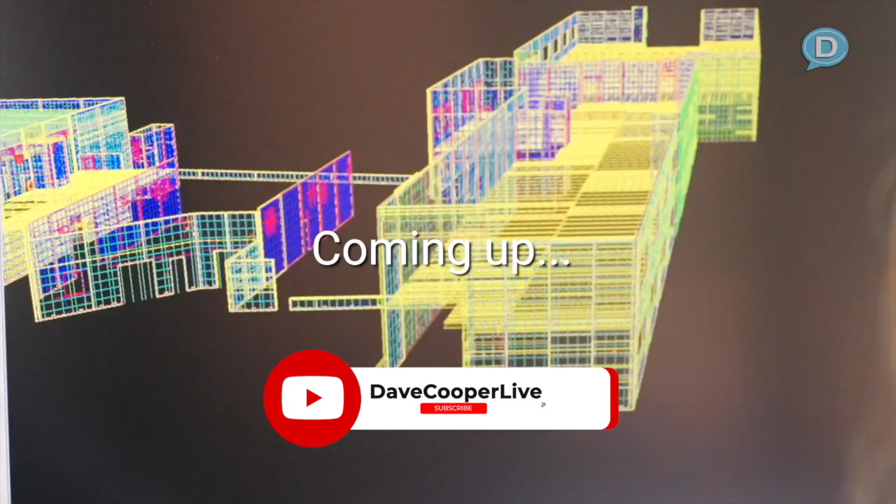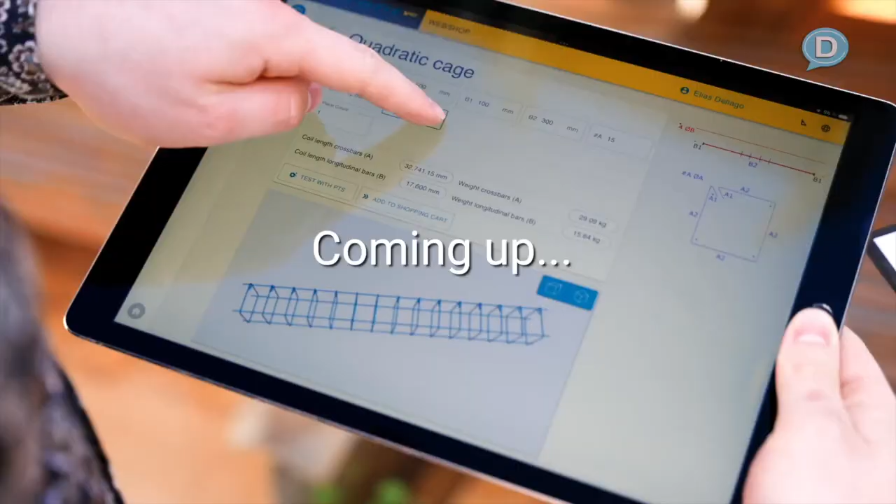Service, what we are providing, is facilitating the change. We are helping customers to change, to go in a certain direction. For that, it's a big advantage because they have a very strong partner where they can rely on and go the journey together with the clients.

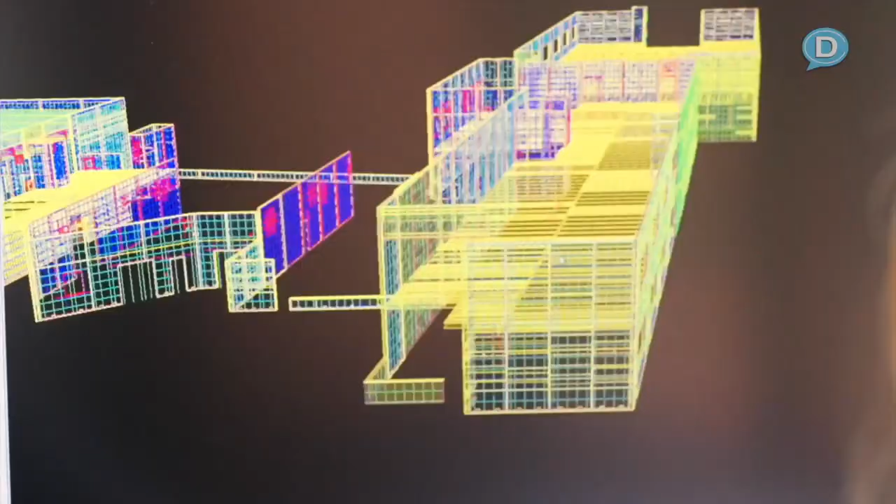Welcome everybody, Dave Cooper, and we are in Brixen, Italy, and today we're going to talk about an end-to-end solution in the industrialized manufacturing space. We are sitting at the Progress Group right now, and sitting with me is somebody that has been here for 20 years working on this, Hannes Huebser.

Hannes, welcome. I love this. So Hannes, tell us a little bit about who you are and what you have been doing for the last 20 years. Thanks. My name is Hannes. I'm working at Progress since 20 years now.

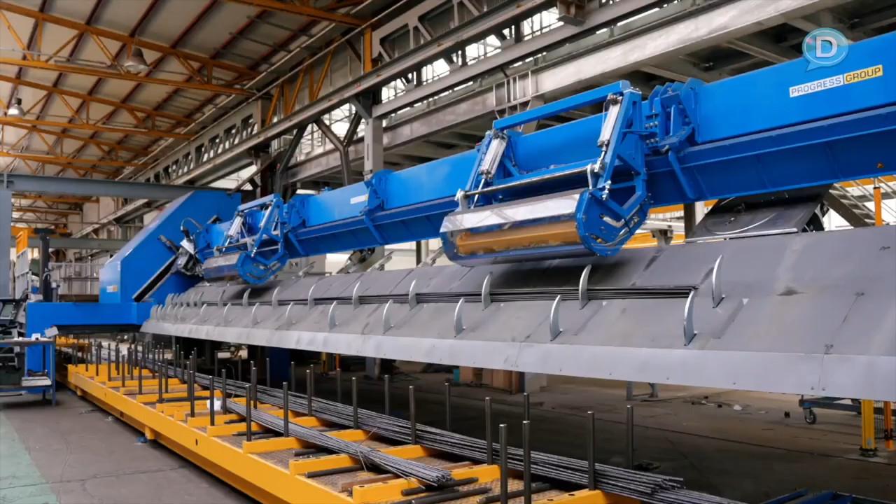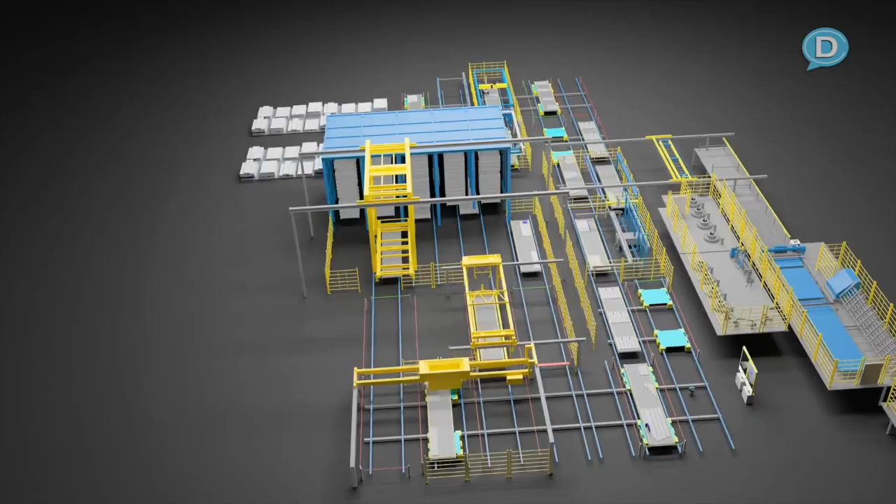I was always in the area of software development, and we evolved in the end from a machinery supplier to a full service provider to our customers, where we're offering different solutions, but all streamlined in the whole process end to end, from design over planning to production, in order to have a maximized output in the single production and to serve our customers better with products and processes in order to improve their products on site and in the end have much better building qualities.

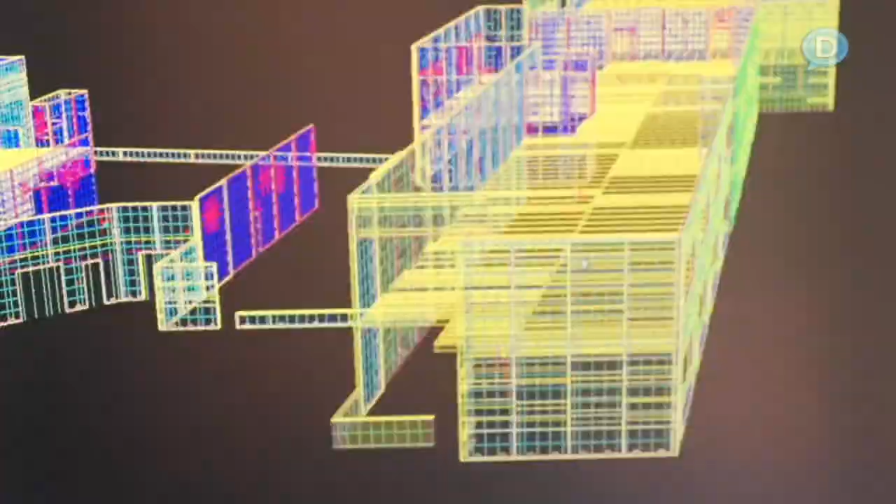I think this is fascinating. An end-to-end solution where it works from the designer, the architect, the engineer, the developer, all the way through manufacturing, through to the actual installation and construction on the job site, to me, is by itself an amazing feat, and a lot of people are really trying to understand how to do that, and you guys have done that here. Can we walk through the different components of what's involved in the end-to-end?

Because we have the architect, right, with their design files. So maybe let's walk through what that process looks like from start to finish. Say I'm an architect, and I want to use the Progress Group and green code, and I want to build with my concrete panelized wall structures with all the technology in it. You have the software that can do it.

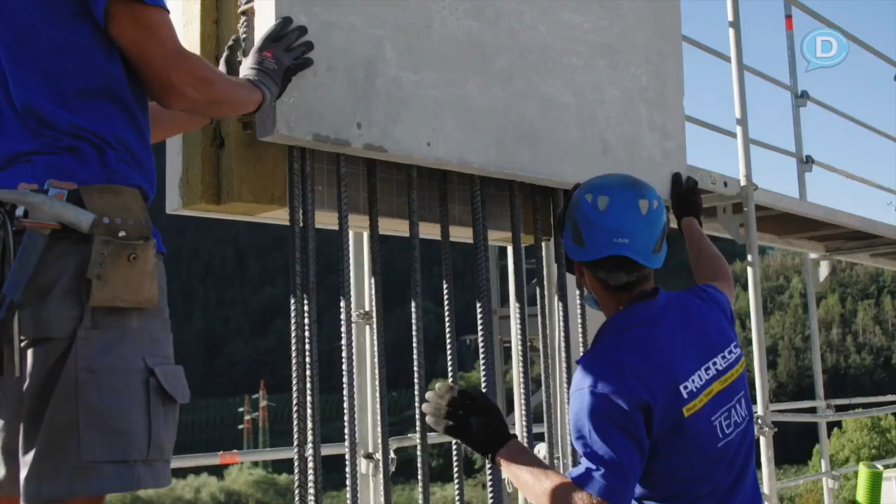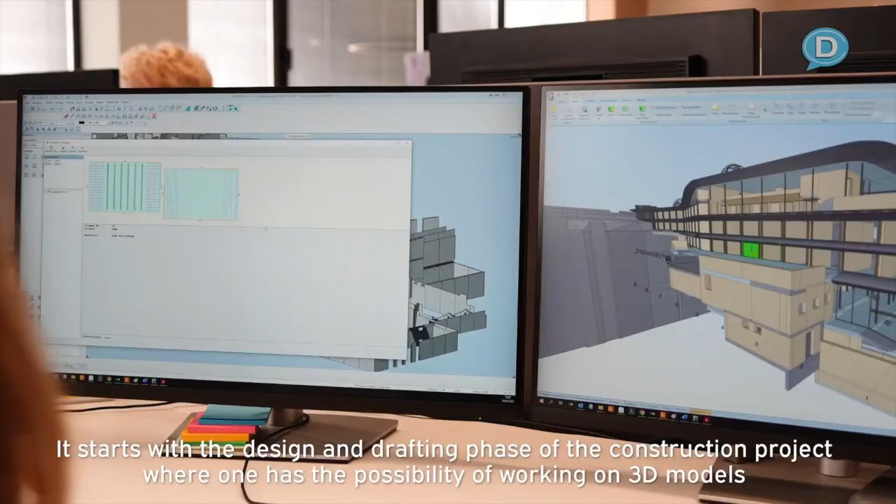Exactly. So what we are doing is, in the end, you can use the architectural model and transform it to our Revit model. We have a solution based on Autodesk Revit, where you can use the model of the architect, transform it in the Revit, and enhance there all the data what are needed for the later production. That means, in the end, you are creating products, we are adding informations, for example, like the electricity, the reinforcement, but all the details what you need in order to have an automatic production later on.

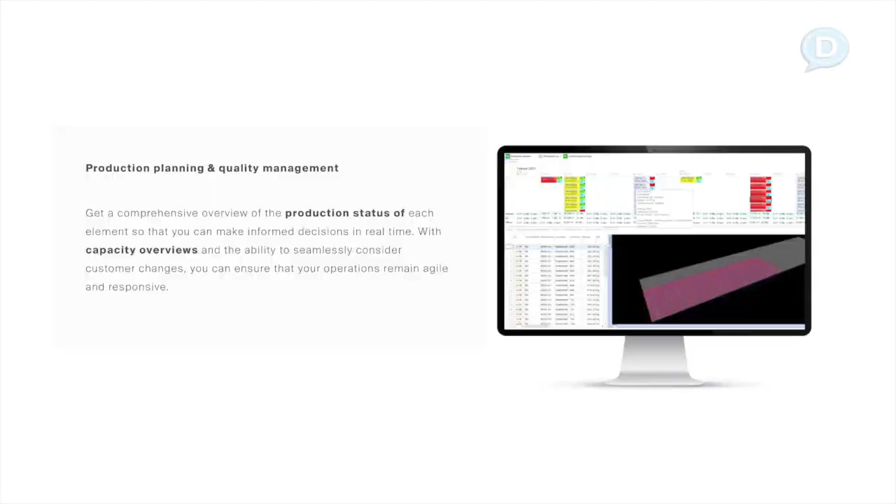The big advantage is you can optimize the single products, meaning also from a resource perspective. For example, you need less reinforcement, you need less concrete, because you can not just deal with the average information, but plan it already quite detailed, what is saving a lot of errors in the further process steps. For example, if you have like this building here, we designed floor elements where all the electricity, the tubes, the lightings, all the single reinforcement components, are integrated directly in the model, which is used then for the later process steps.

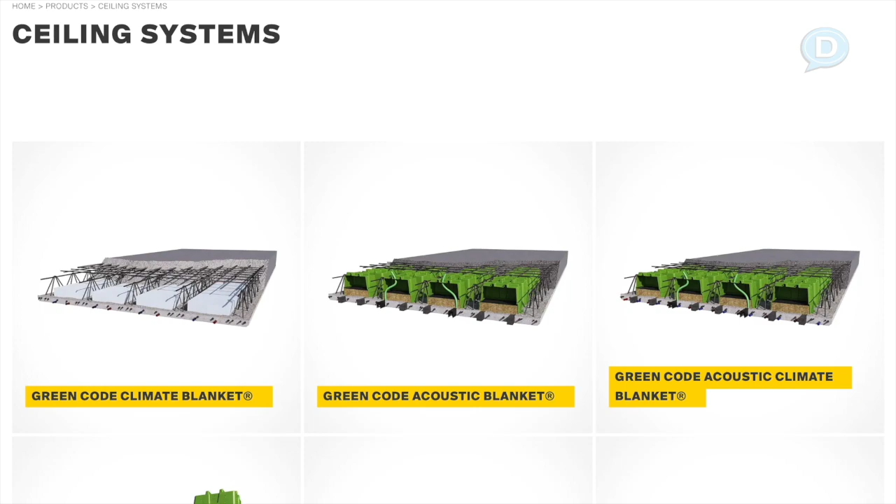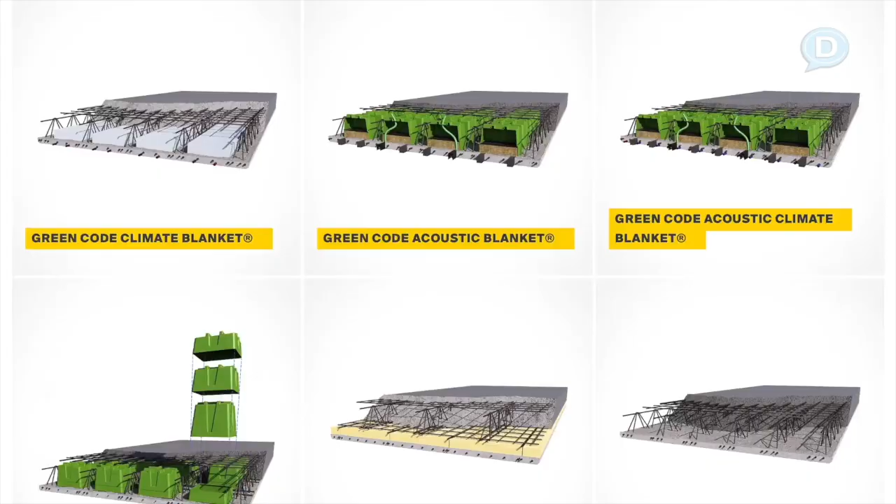So when we talk about the tubes, we're talking about heating and cooling, climatic ceilings already designed in. So if I'm a designer and an architect and I say, you know what, I want to build this way, but I'm just not sure how to get into it - you've pretty much taken the guesswork of how they can get into it, not only from the static structural elements of the building, but also the MEPs, the electrical, sound insulation, the acoustics, as well as insulation in general for heating and cooling.

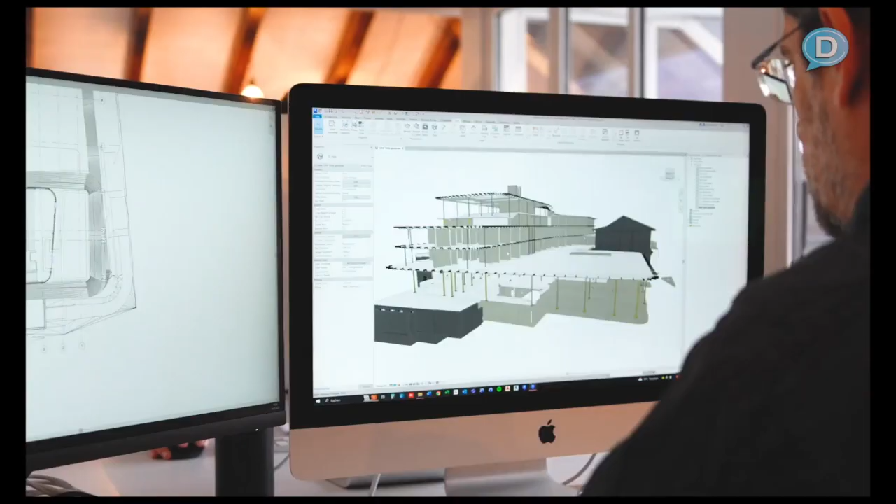So in the end, we are providing the service to our customers. We show them how to use the software solutions in order to build such products. That's a big advantage we can give to our customers, closing the gap between the architect and the structural engineer, streamlining the process where you're gaining a lot of time savings and material savings, becoming more efficient moving forward.

All right, so here I've designed a set of plans. I hand them over to the team here at the Progress Group. What happens next? So in the end, we can use this model and enhance it with information needed for precast.

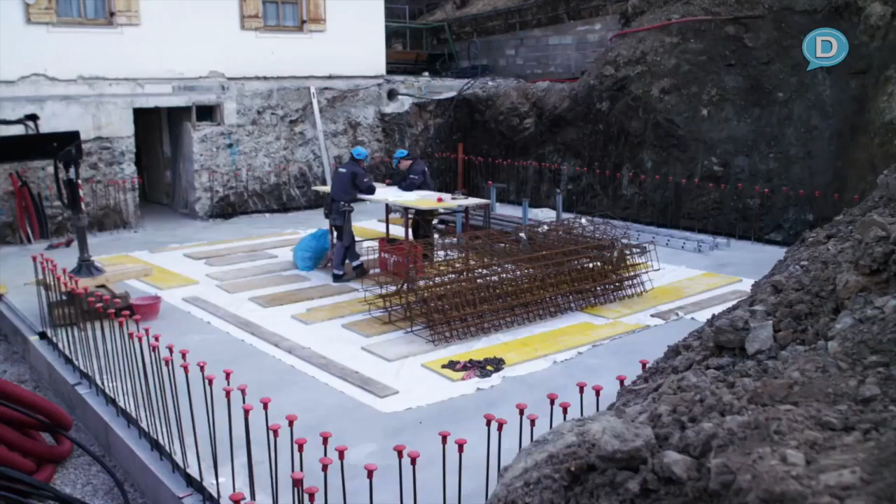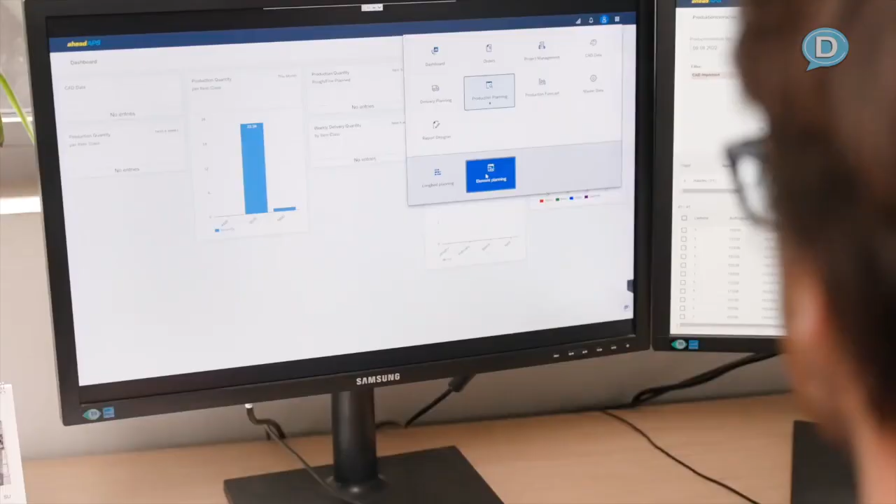We are detailing the single design, cutting it in pieces. We are also checking with the construction company for the erection sequence, meaning when you need the single pieces on site. We prepare the whole model so you can produce it just in time, but also in the sequence needed on the construction site. So the process begins with the end in mind - how is it going to go together on site?

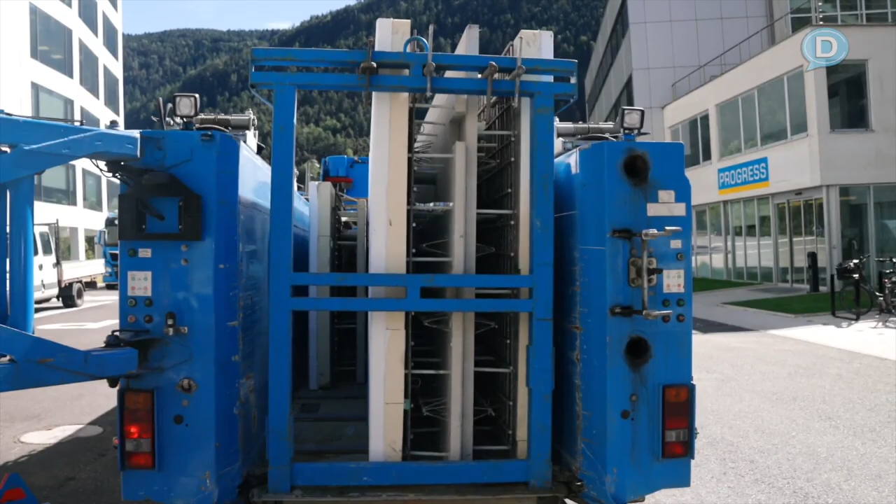And it sounds to me, if I understood you right, that you value engineer. You take their plans and say, well, we can optimize the efficiency of this construction, the efficiency of the materials, and you make those suggestions on your plans in collaboration with whoever the designer and architect was?

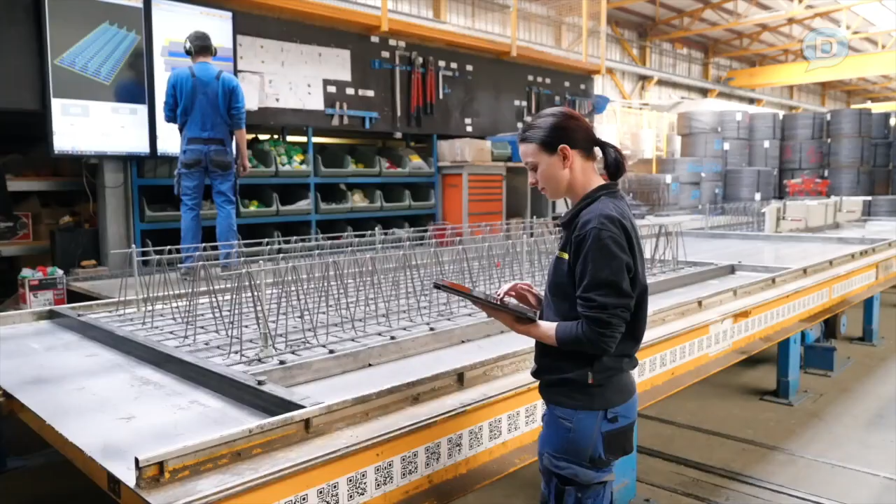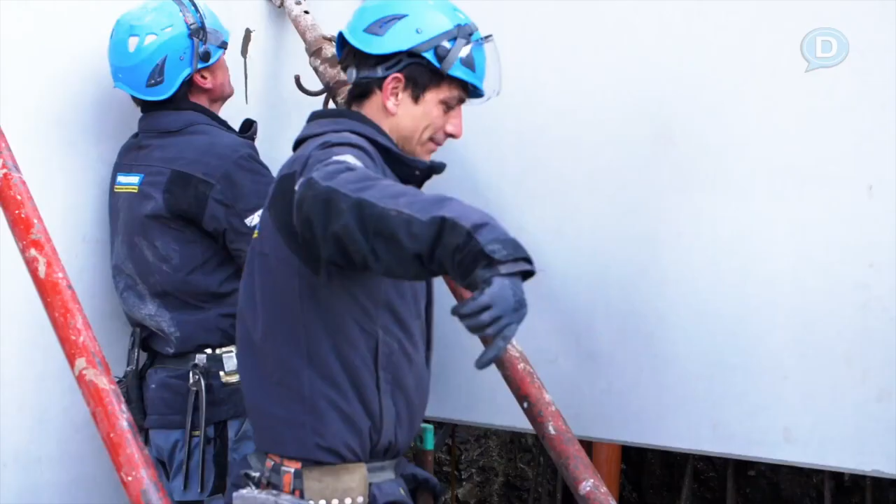Yeah exactly, because you can optimize the single products, but also the whole building in a controlled environment. That means we can plan it digitally, and we're not depending on single workers on site to make an optimization or cutout. So it's all controlled and industrialized. That means better quality, better safety standards, because we're not depending on people on site, and we need less people on site. The whole construction process goes much smoother, with big time savings and material savings, and we're shortening the whole life cycle of the construction.

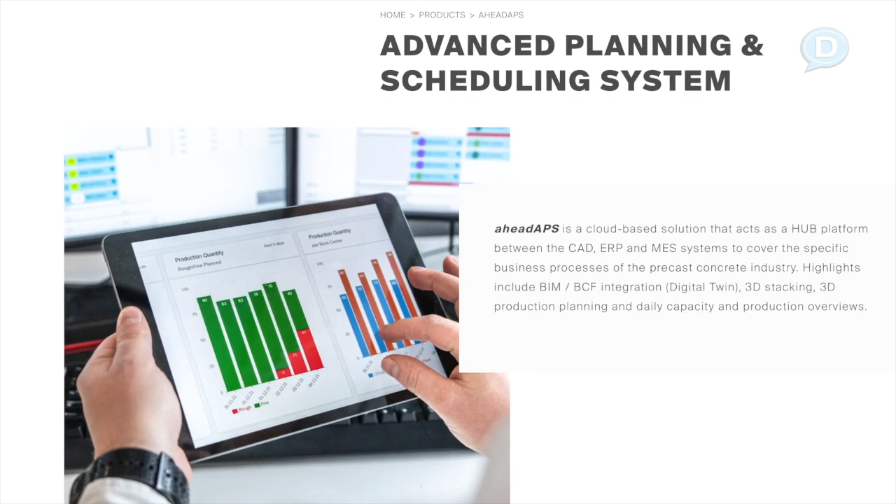Right, but this all translates back to the consumer whose project it is. Exactly, so in the end you have a better controlled environment, better safety standards. You need less materials, and in the end you have a cost advantage there, and you know what the cost is. You're not subject to the market changes as much, for sure.

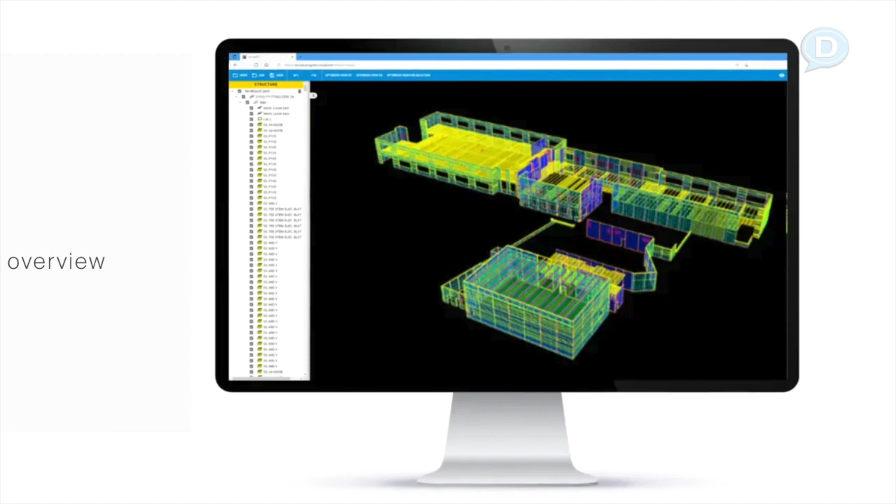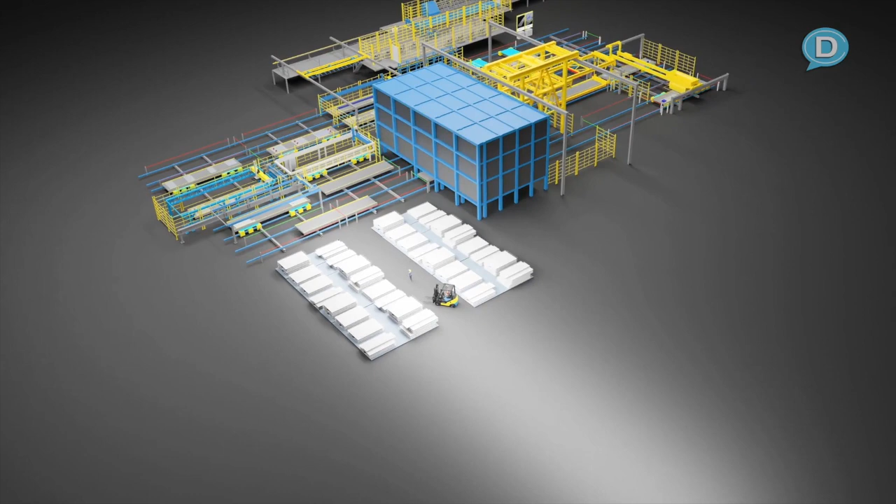All right, so you take their design and you do a digital twin, right? So you have a BIM model or Revit model of whatever it is. Everybody signs off on it and agrees, and then that model goes to manufacturing. Exactly, so in the end we plan the full process of how it should be produced - from a project management perspective, also from a supply chain perspective, and we steer the single production lines with the correct information.

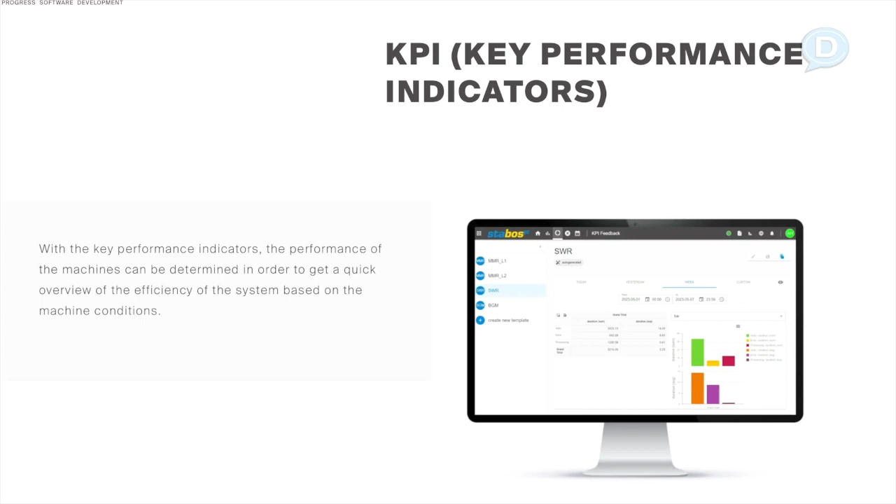That means we can optimize what needs to be produced, but also how it should be produced. There are some algorithms in there which can optimize the single productions for the efficiency perspective, and we can control all the materials needed in the production in order to produce the final element.

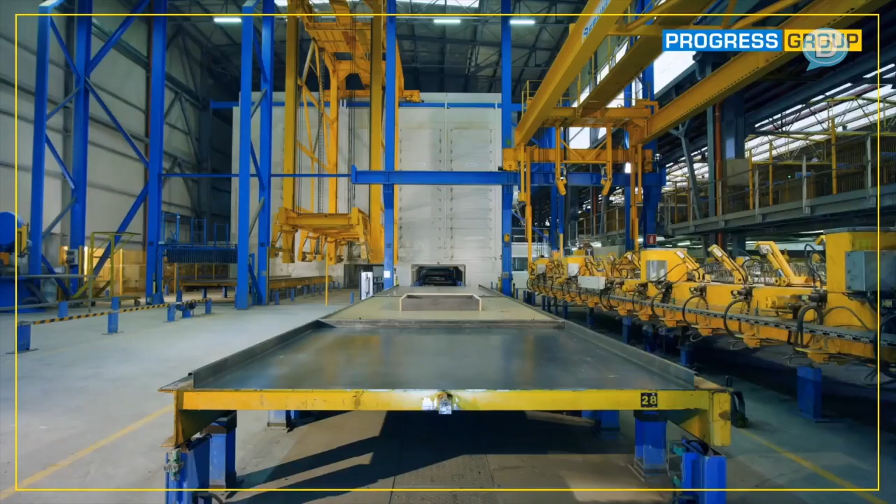From a designer and architect's perspective, am I limited on what I can build? In the end, you are limited by what the machines can fulfill. If you're splitting up the building into smaller pieces with single elements, you have a certain restriction, but that restriction isn't really a restriction because you can optimize that already in the model. So from an architectural perspective, there's not really a limit. The boundaries are more what the construction site is able to handle, but from a system perspective, there's not really a limit.

So you're not limited on your design - you can pretty much do any design. It's more just what the machines and the size of the panels can produce, or what the shipping requirements will allow, wherever it's going.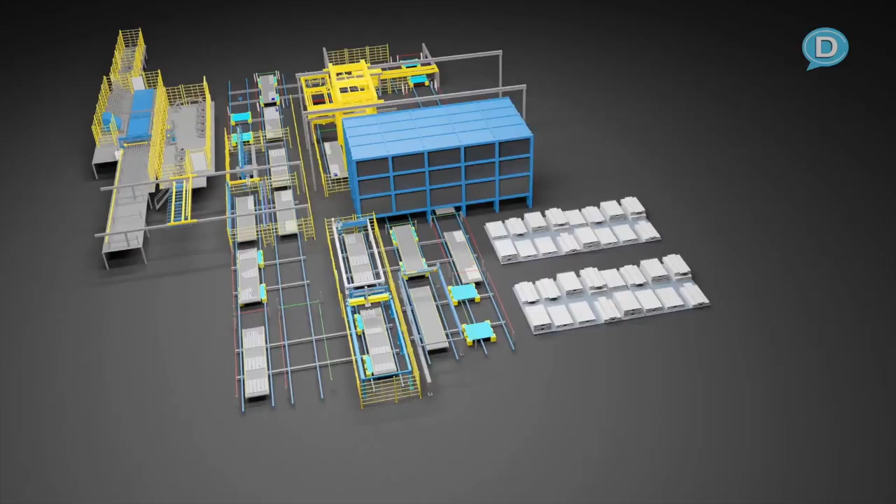Can changes be made real time to the plan? That's exactly the biggest advantage you have there. Since you have an integrated workflow from design to production, you're able to always make changes. Until the final production, you can always make constant updates.

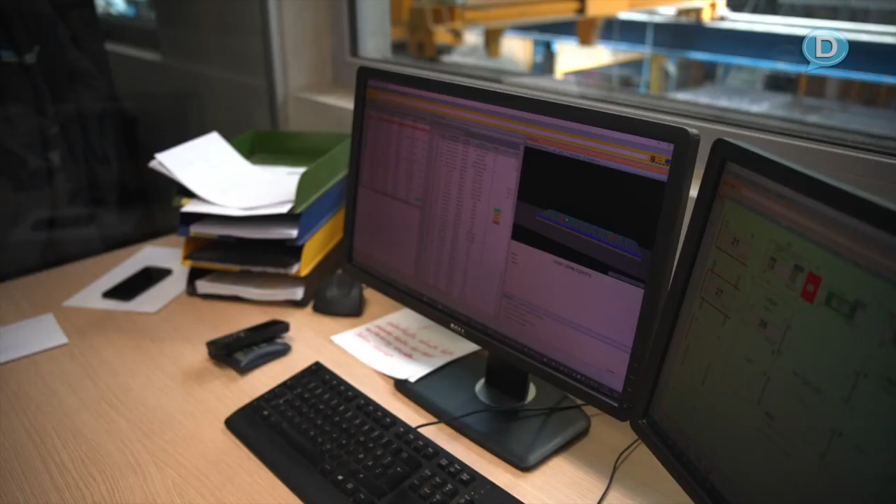The big advantage is, since we're streamlining the whole communication between the parties, everybody sees the same information. We're not depending on breaks between the single process steps, but we have one model used from design to production, meaning you can make constant changes up until a certain point. So it's one digital twin that everybody sees and works on, and if something is changed, it's automatically updated on everybody's tablet or computer.

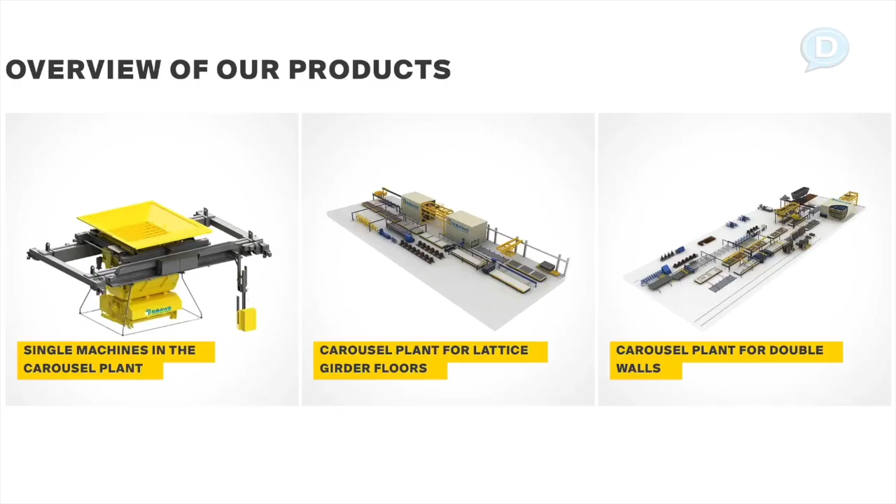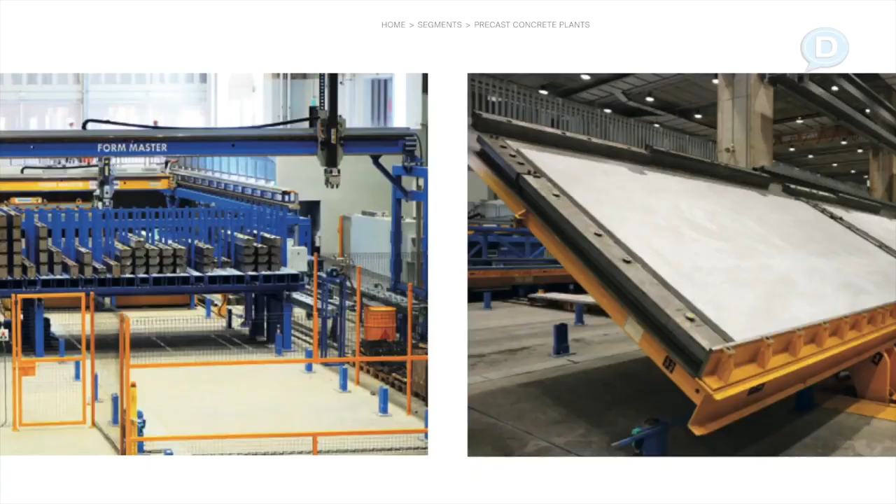The manufacturing side of this is super important alongside the software side, because you also build and develop the manufacturing machines. The Progress Group really controls everything in the flow of the products that go through. Exactly - we're not just doing the digitalization, but also the automation in the end. That means we're building the single machines, which are optimized, and with a digital process, automated machines used in an automatic plant. Later on we control the full process and full life cycle of such a product.

My project's now online. As an architect, designer, or one of the stakeholders in the project, can I actually visually see what's happening in the factory online and where my project is?

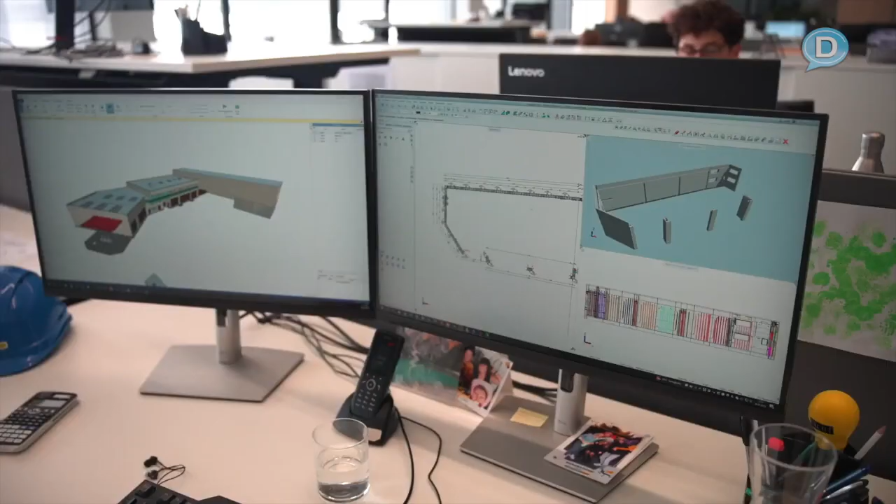This is actually the biggest advantage of a digital twin, because we can always feed back information at each process step. That means when you're producing a single element, we know exactly which type of recipe we used, which type of reinforcement, which type of electro boxes we put in, from which supplier we purchased them - so you can always trace back. That information is all provided to the model, meaning at each process step we know exactly where we are in production.

Are quality checks made already? Is it proven? Are there any issues? All of that is saved and can always be traced back to the single element, and used later on also for maintenance purposes, for example.

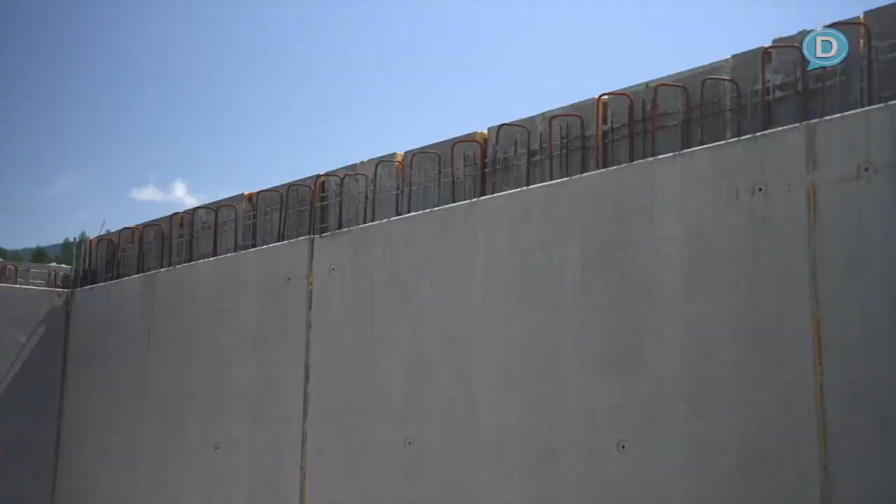That brings up a good point about tracing everything. What if I'm building in Austria or Germany and not here in Italy - does it change the process, the quality, or the materials I'm getting? The process isn't really changing. Obviously the type of materials I'm using is different, because, for example, the reinforcement is different here than in Austria. It's also important to always trace back where I purchased it.

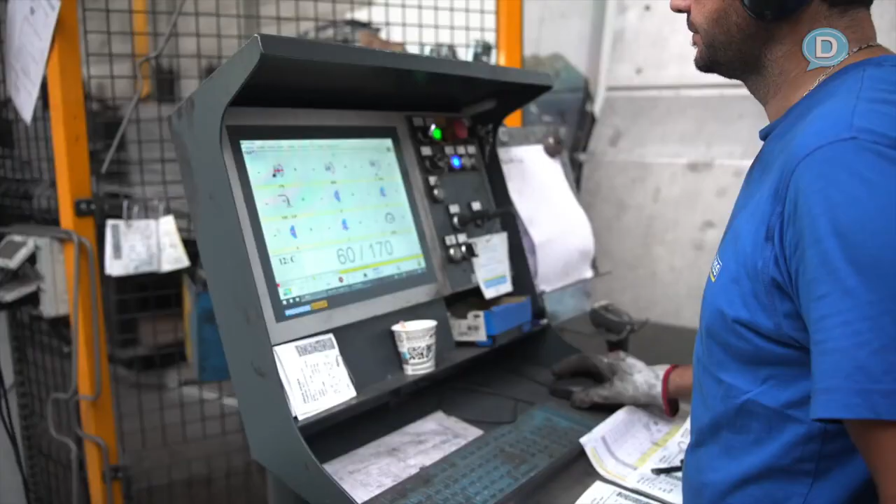For example, if there are quality issues with the reinforcement, we know exactly from that batch of reinforcement, which buildings did I use them in. So we have perfect traceability. It doesn't really affect anything - the same quality comes out every time. It's just whatever the building code requires - more building terms, regulations, that sort of thing. But the quality is always the same.

So here we are - we're in production. The first panels are coming out. Walk me through what happens at that point, and I'm sure the job site prep has already begun, right? We're ready to start building this. How does the end user know what's going on? Do they have access to the digital twin?

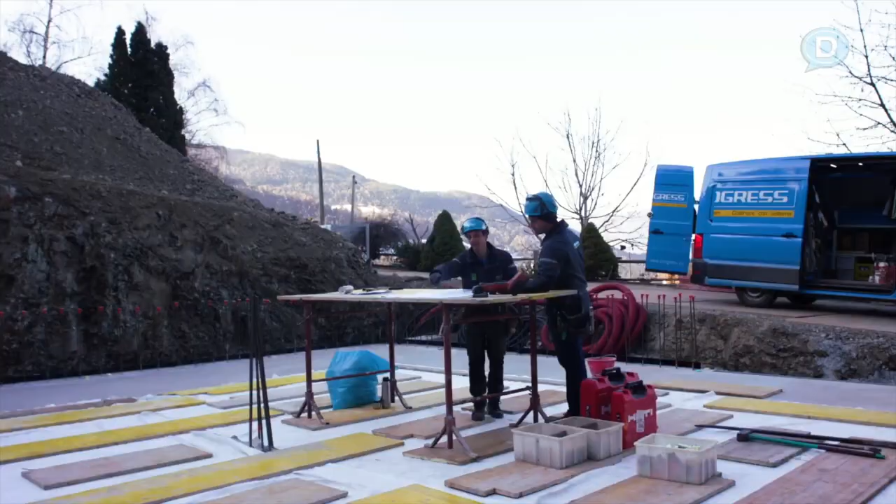Exactly - we're in constant communication always with the construction site. They can access our system with a tablet or smartphone. They see exactly which type of elements we're currently producing, when the next stack needs to be shipped, and when it will arrive on site. They can also communicate with us. For that, they don't need paper prints - they can always see the current status and information on a digital platform.

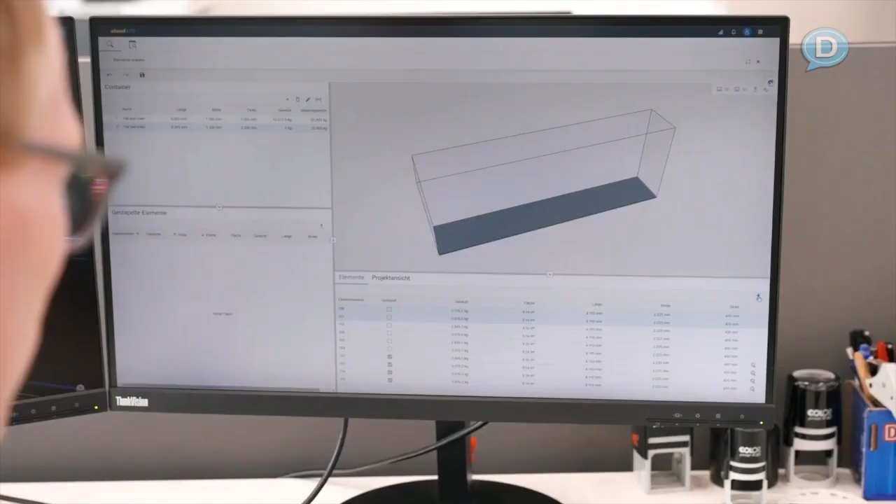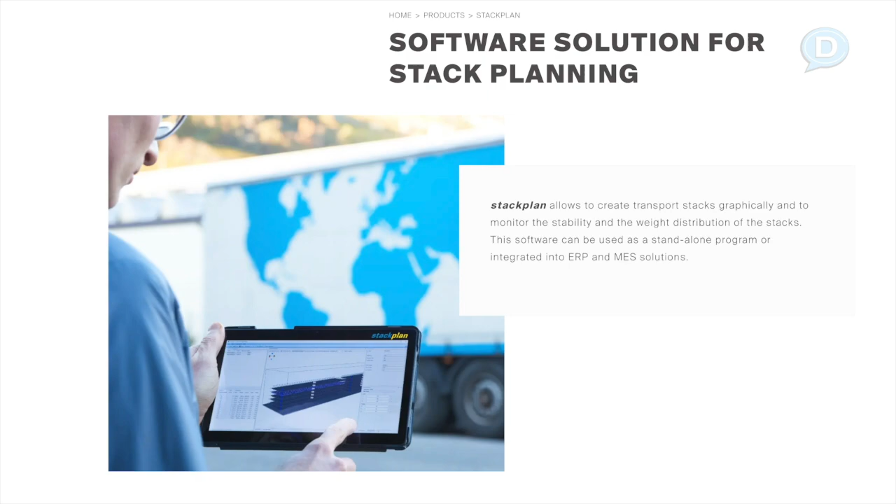Not only do they get that information, are they also getting the kit of parts for the assembly? When the walls ship, do they know exactly how everything's tied together, all in one place on the set of plans? Yeah exactly - when you make the shipment, it's already a package you're receiving, and from that package you know exactly which element needs to be erected first, second, third. So the whole erection sequence is already planned from a design perspective, used in production, and later used on the construction site.

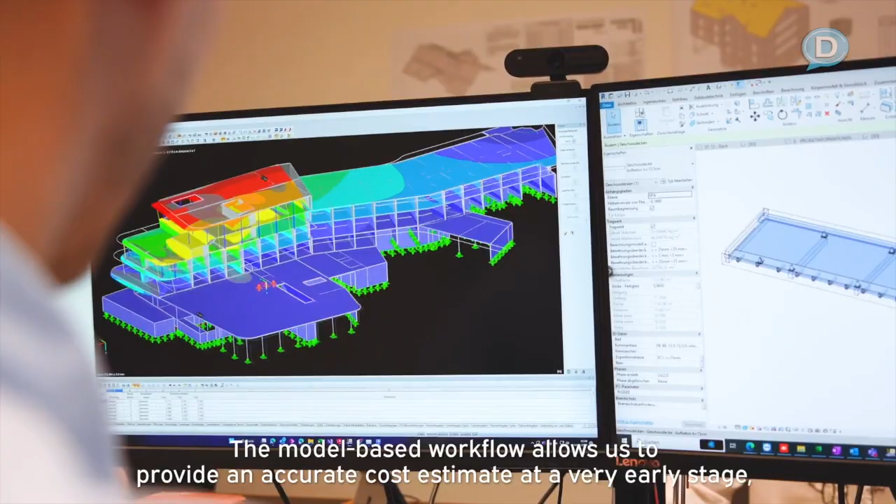So let me get this right - as an engineer and architect, you've designed the programs and software so you can import information, or others can use your design software, correct? That information then pulls all the data for structural elements and gives you your full product list needed for the project. From there, you take it and then you have costing.

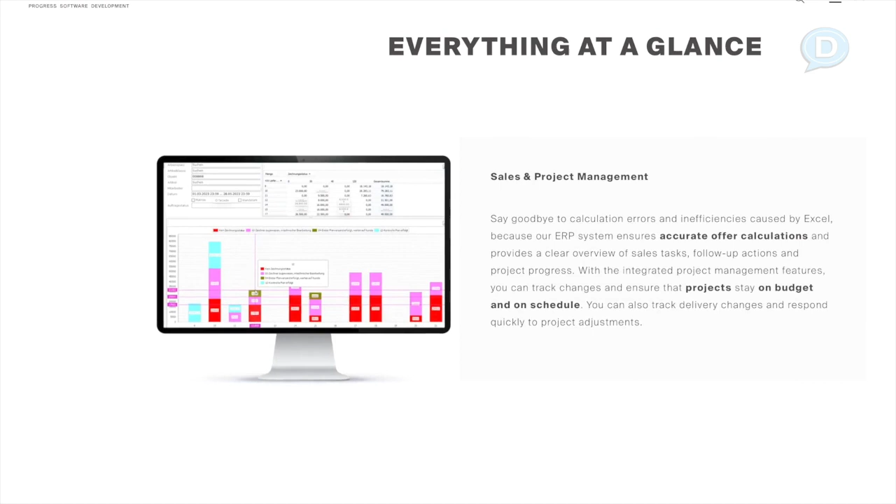And now you know exactly what the building's going to cost, and you can give that back to the architect along with the designs. And the value engineering that you said, hey, if we do it this way, it's going to be much better, right? And you work with that.

Then that data transfers to all the equipment and machines. We haven't changed softwares. It all transfers to the manufacturing side of this. And then the robots in the machine, or the automation in the machine, they know exactly what to do.

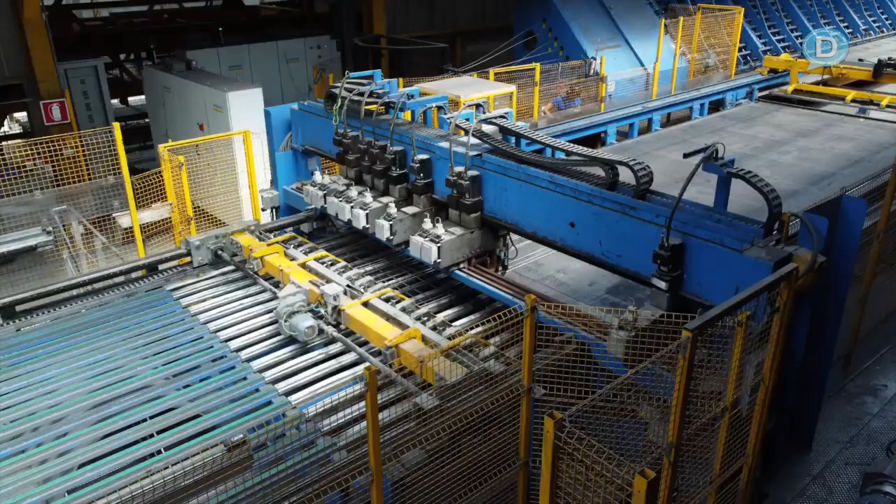And in real time, they can make changes based on the different structural elements, right? Because we have all the rebar down there. There's thick rebar, small rebar, and it's constantly adjusting when we were looking at this, and it's thinking its way through each part of the production line. Yeah, exactly. So it's not, for example, that you have to produce the rebar first.

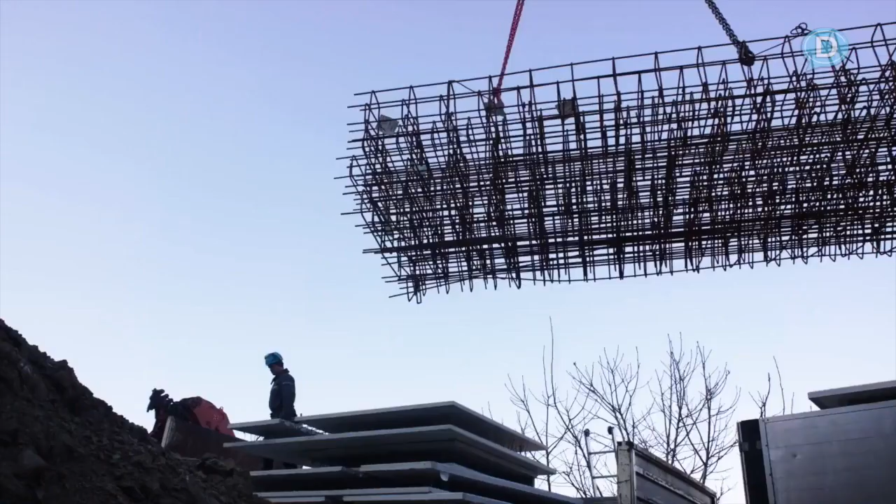You can then produce just in time directly on the site. The site means a single table where I'm producing that element. So that is a big advantage. You're saving transportation costs also, because you are producing them just in time directly in the plant. And you are very flexible in the end, because maybe one element needs a cage, another one needs some bendings and some cutouts, and they are all produced in a way that you're saving materials, you don't have any waste. It's a much better controlled environment, and we are very flexible.

Here, and we're in Europe too, space is limited in a lot of areas, so not having everything come at you all at one time is a big deal for space.

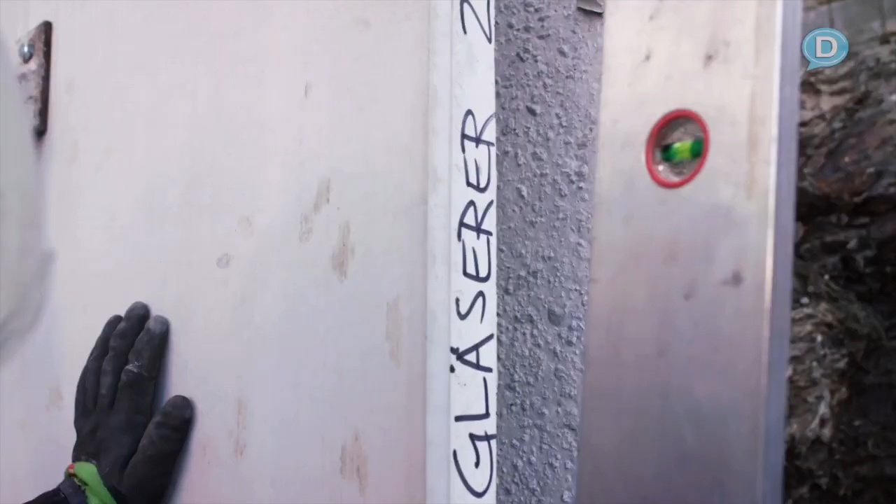All right, so now we're on the job site. The on-site general contractor or trades know exactly how this goes together, because it's just in time showing up to the site as well. Exactly, yes, for the production of it. And the end value of this is now you have a digital twin, you know every piece and part that happened from the design all the way through the manufacturing. And then there's a whole set of data behind that that says, hey, if we ever had an issue in the future, we could pinpoint it and resolve it quickly.

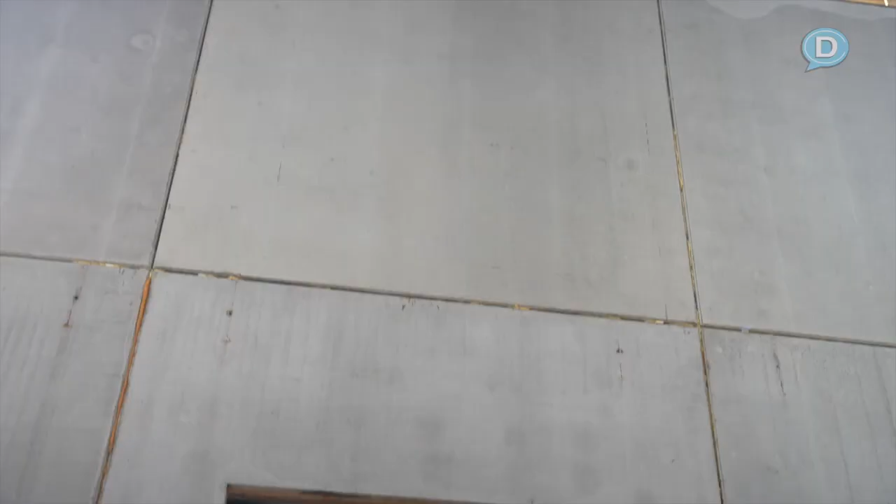Yeah, exactly, because in the end, if you have a problem later on in the maintenance for some wall, you know exactly, okay, this was this wall, we can trace back, it was this type of steel we had in, this type of recipe, this type of electrical boxes, for example. All that information is there. It's like a big handbook in the end, what you're generating.

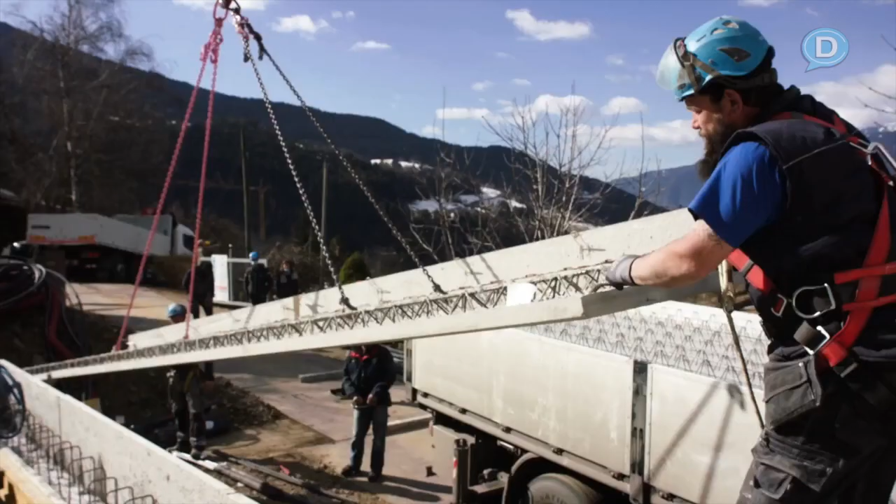The manufacturers that are using the product, right? Here in Brixen, you're doing your own manufacturing, you have your own automation lines, and you got the whole team of engineers and software folks. Your partners out in the field, whether it is in the design and architectural side or manufacturing side, they have the resources and the support at any time they need it from the main headquarters here. Is that right? That's exactly, yeah.

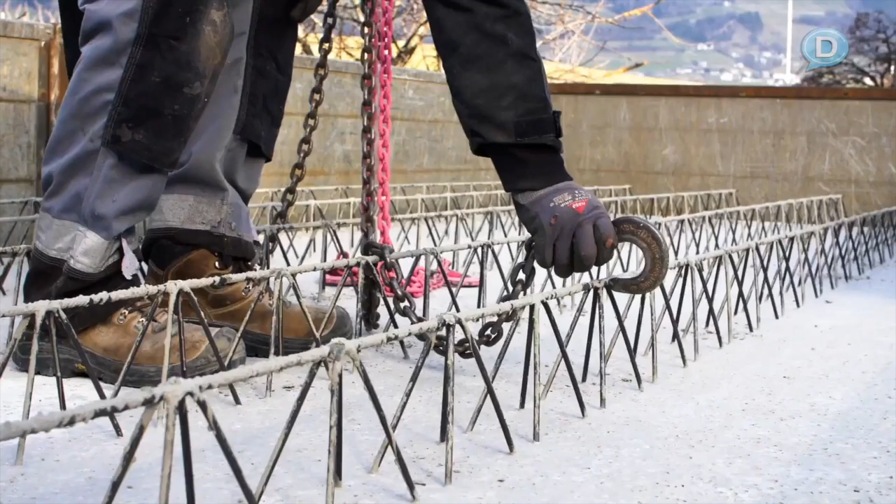So for example, we have some special guys which are just, for example, for product development and also for the support, but they are all constant in contact with our customers. For us it's very important to be very near to the field, to have feedback, how the software is working, how the process is working, how we can optimize them. And for that we have a very close contact with our customers, and they are supported with different support teams also globally. We have different service centers in different parts of the world where they can be supported directly there, but they are all integrated with the main knowledge we have here in our headquarters.

Yeah, and that's what I love about it, right? So if you're out there and you decide that you work with the Progress Group, you immediately add a couple hundred people to your team of resources that can help you build and resolve problems or to make things happen.

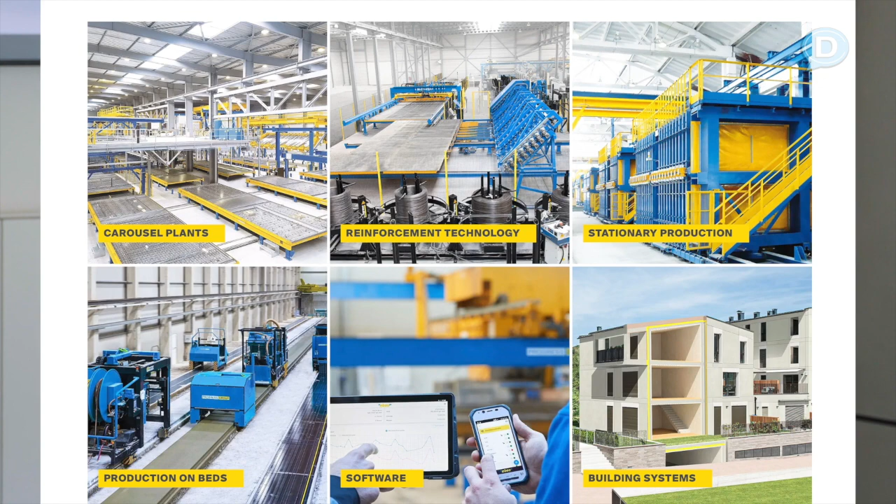So the big advantage for the customer is that he has a big access to knowledge in the end, from a knowledge perspective, from software automation, but also from building systems. And the customer, they don't need to go to different parties. They have all the knowledge directly under one roof in the end.

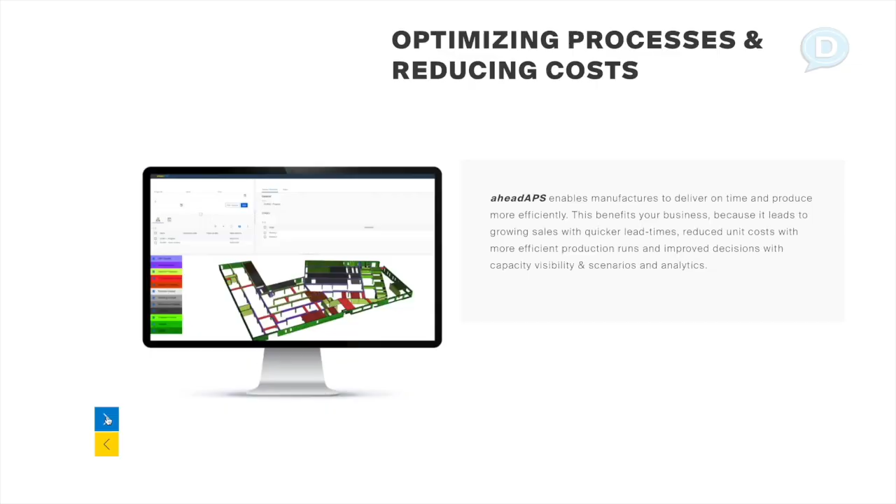You have the R&D here. You have the team of professionals that have built this entire process. You have the entire customer support team behind it, and you are constantly improving and talking with the clients to get real-time feedback so you can consistently make tweaks to your system as well. Exactly, so we can provide that more or less in real time, the updates. We are optimizing on a daily basis, always the end-to-end process.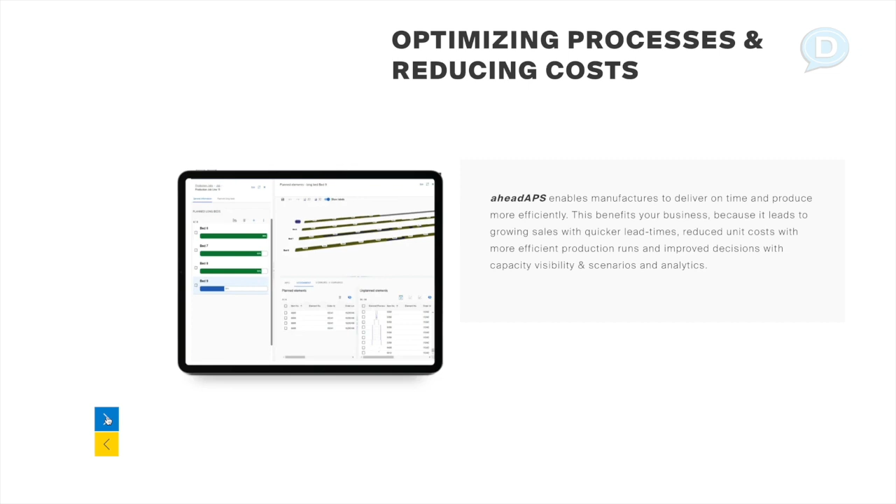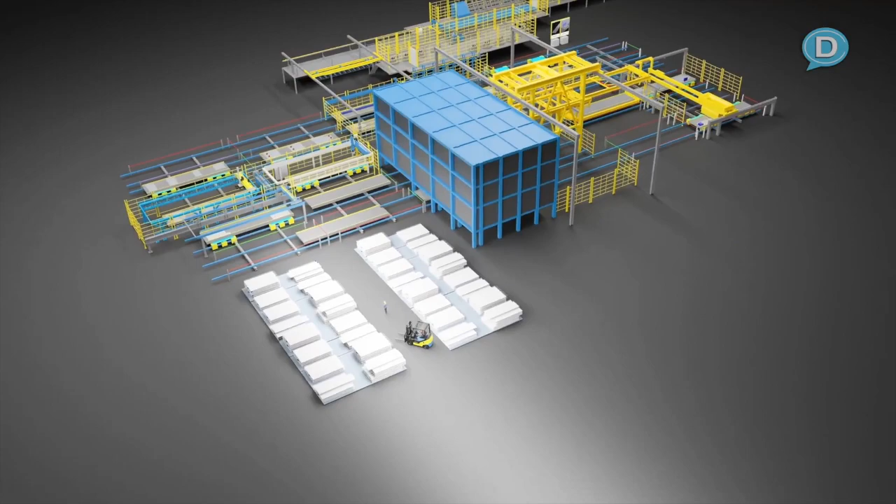End-to-end, what do I mean? I mean, in the end, how the buildings should be designed from a design perspective, from an engineering perspective, but also from a whole, how to digitalize that information, but also how to produce the products in an automated way. So in the end, it's an end-to-end service what we're offering to our customers, which is constantly updated and lives also with the feedback of our clients.

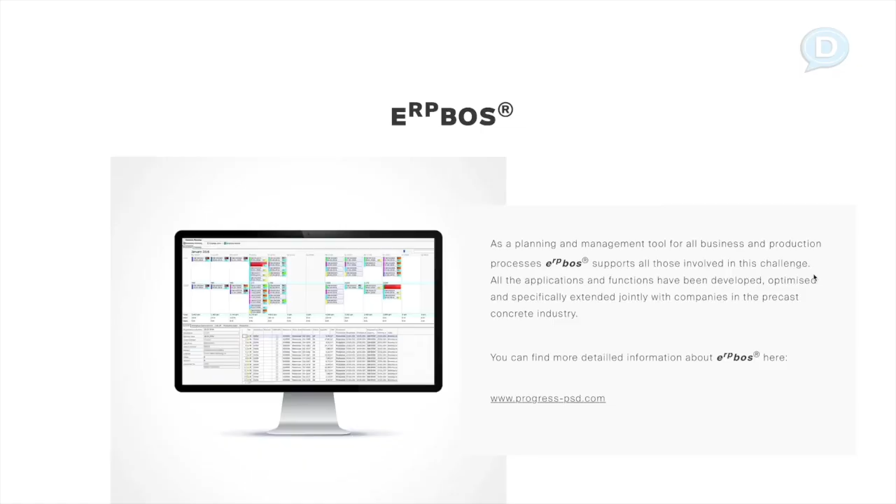You've been working on this a long time. Would it be possible to do what you've done and write the software that you wrote that's end-to-end if you also didn't own the equipment line and the automation lines? Is it even possible to do what you've done elsewhere?

In the end, obviously, the barrier to entry is very high there. You need to have a lot of knowledge, not just from an automation perspective, but also how to digitalize the information, but also from a building perspective. Because the Progress Group, in the end, is not just automation or digitalization. We also have a very big part in building systems. And for that, the knowledge what we have is in the end all shared in our products what we're offering there.

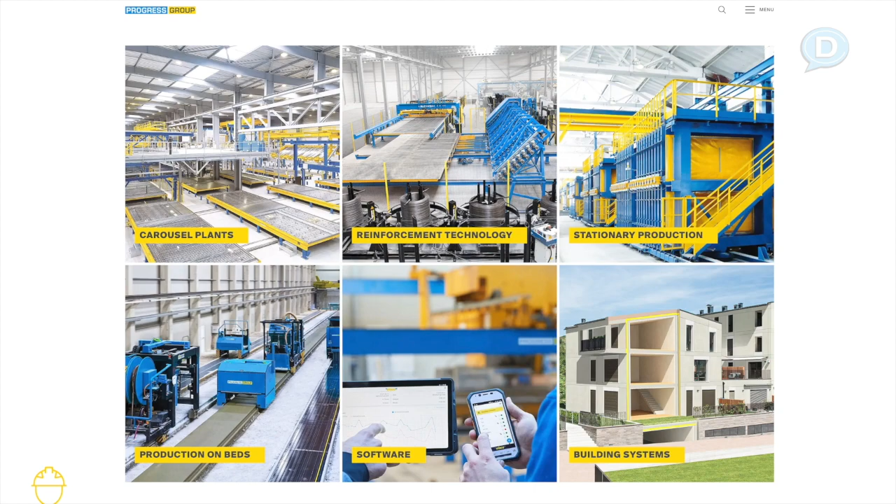What was the hardest thing for you on the journey of doing this? For sure, the hardest thing is to understand also the different cultures, the different way of building, but in the end, the core is always the same. So you need to convince people for changes. That is, in my opinion, the biggest challenge, that you are used to work in a certain way, and you are also very successful for that. But in the end, the change part, that is the most difficult - to go in a certain direction, to understand what is possible beyond also my daily work. And that takes a lot of time in the discussions, but it pays off in the end.

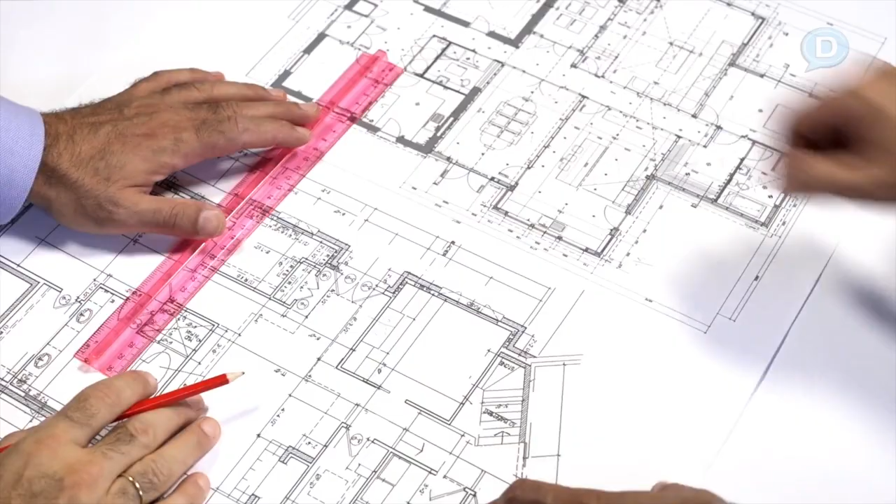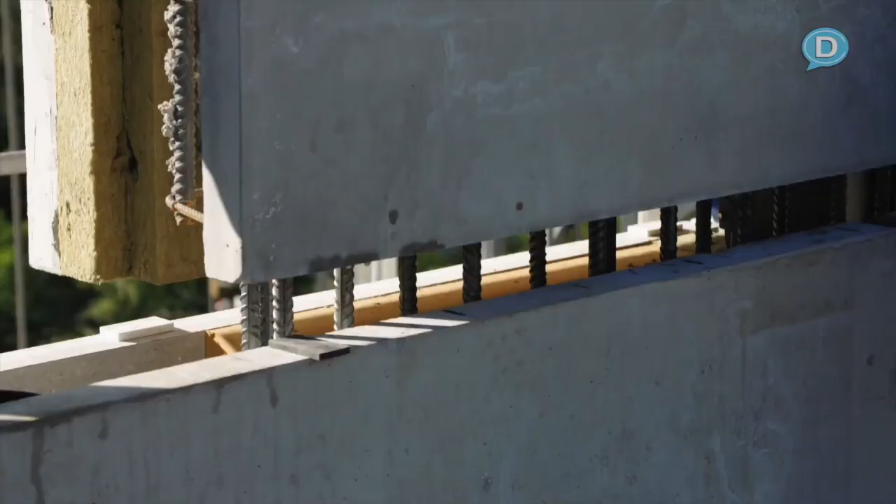The change is hard for everybody, but what I'm hearing is you've kind of taken away a lot of the stress of making a change from your traditional way of designing and building by putting all these checks and balances and controlling the process. Yeah, that is exactly the service what we are providing, facilitating the change. We are helping the customers to change, to go in a certain direction. For that, it's a big advantage because they have a very strong partner where they can rely on and go the journey then. We would like to go the journey together with the clients.

This building we're sitting in is a prime example of what can happen with your system and all the technology that's built into it. It's absolutely amazing, and it's beautiful, and it's super comfortable, and the whole building is precast concrete. Thanks, yeah, absolutely, yeah, we love it.

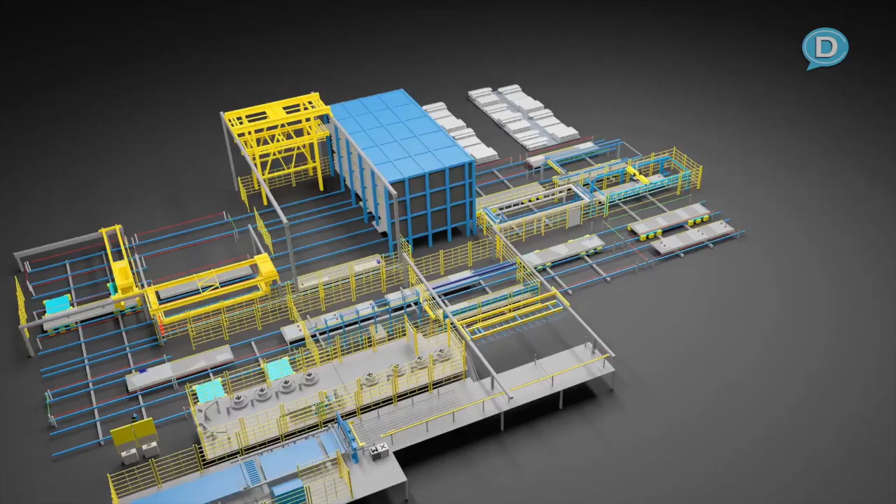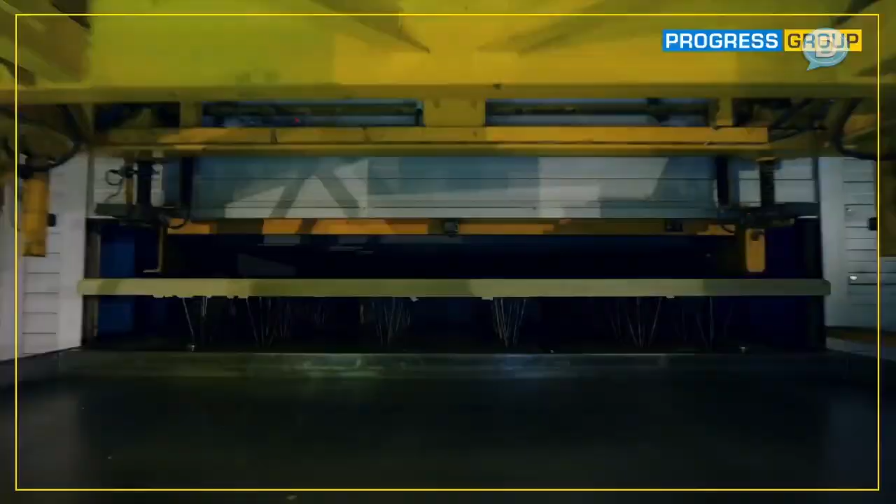Is there anything that I didn't touch on that you feel people should know about what you're doing here at the Progress Group? In the end, Progress Group is a full service provider of not just automation, digitalization, but also of building systems. And in the end, the biggest leverage what you have to change, for example, how buildings should be done, for example, also from an environmental perspective, is in the end, you have to change the way how you design during the process, but also our customers and the buildings, how they make them.

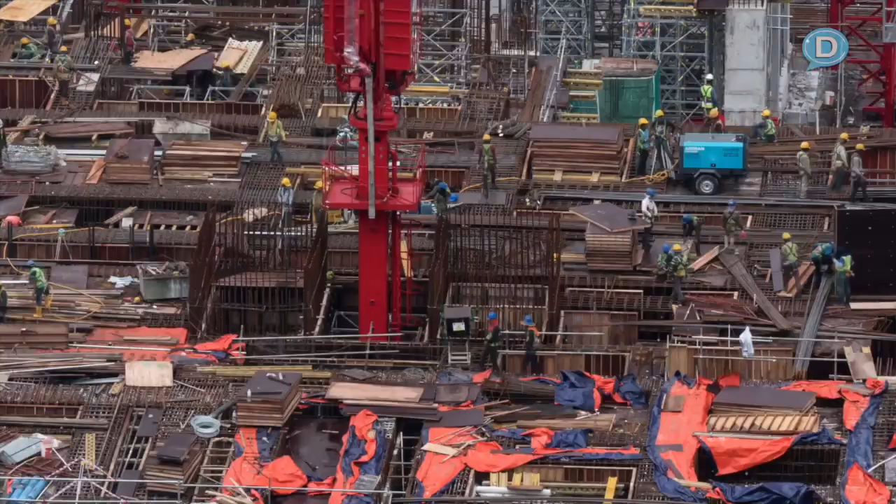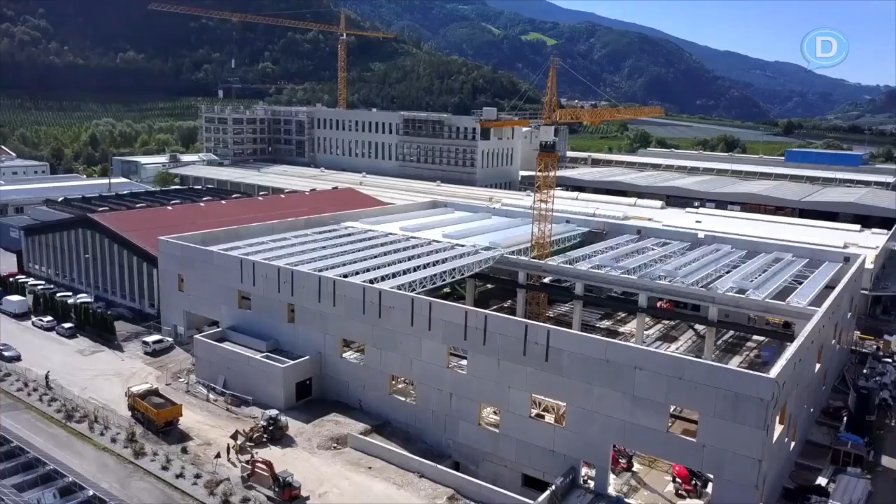So if you're a designer, you're an architect, you're an engineer, and you want to be more efficient, you want to have better control of your projects and the products that you're delivering to your end user, this is a systemized approach that is, in my opinion, one of the best out there that I've ever seen. I've not seen an end-to-end solution like this yet. I highly suggest taking a look at this because they took the complexities out of doing it.

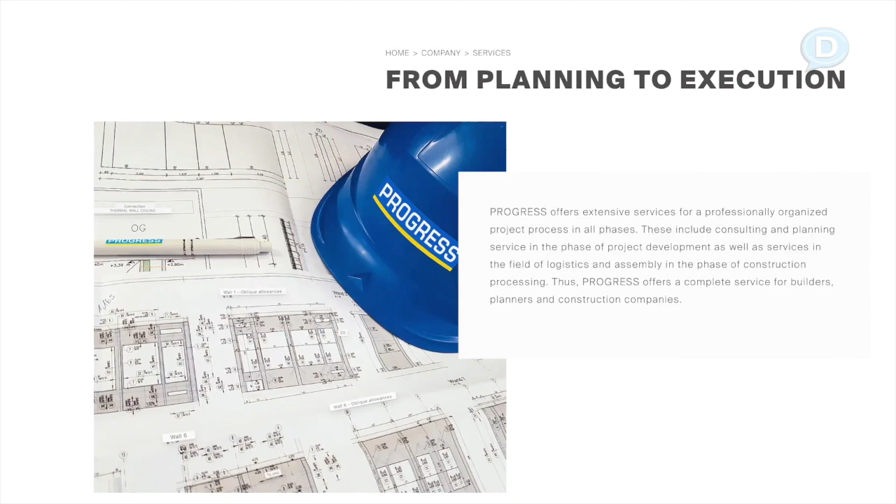If you're a manufacturer of concrete wall panels, or you want to be bringing this to your market, you guys also set everybody up. You have the equipment and you partner with them to deliver the same services anywhere around the world, correct? Absolutely, yes. So, I mean, from an end-to-end solution, you're not only helping the end user whose product it is, you're helping the architects and designers and engineers, but you're also here doing the same thing with the manufacturing, regardless of where it's at. So I commend you for everything you're doing.

Thanks. This place is awesome. There you have it, everybody. Progress Group. I am sitting with Hannes Huebser. I'm Dave Cooper. Thanks for watching.